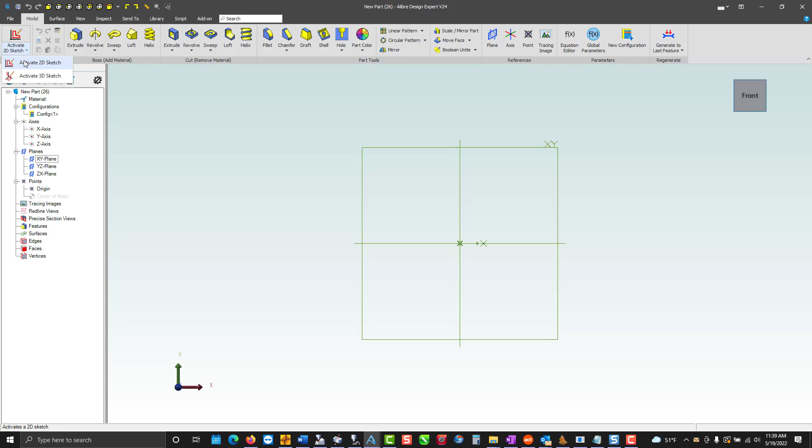First, we're going to activate a 2D sketch. Then we'll select our drawing plane. I'm going to use a connected line to define the general boundaries of our part.

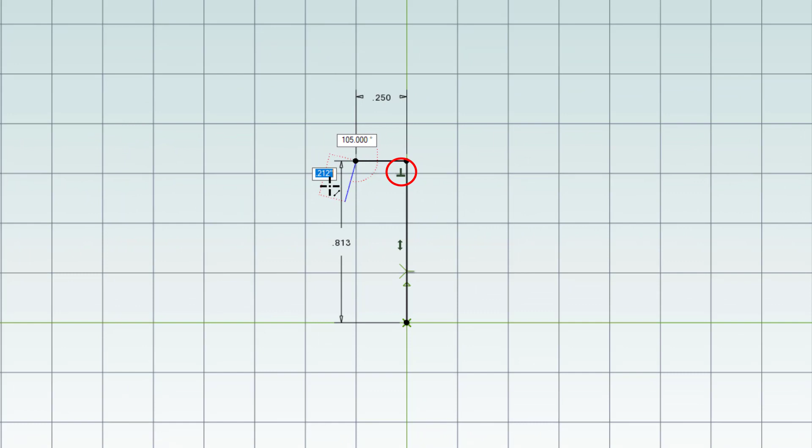In the corner, you'll notice there's a symbol, a constraint. That means these two lines will always be perpendicular to each other. I'm going to freehand the rest of our part.

The sketch has to be closed when dealing with 3D models. Now I'm going to add dimensions where there are no dimensions.

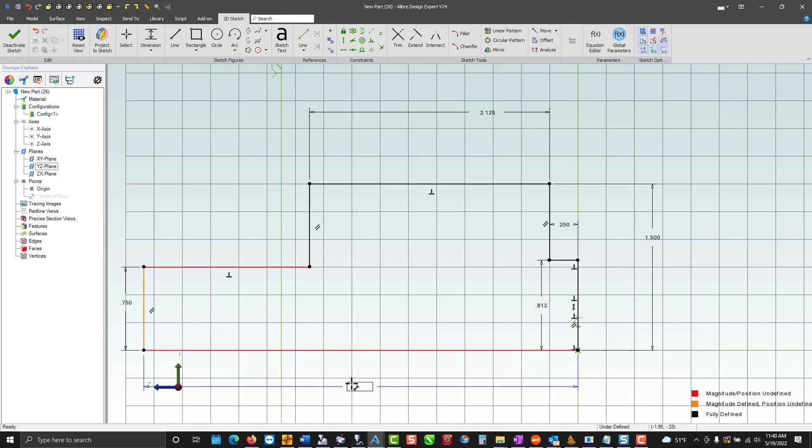I'm going to generate an OD groove. Trim the center.

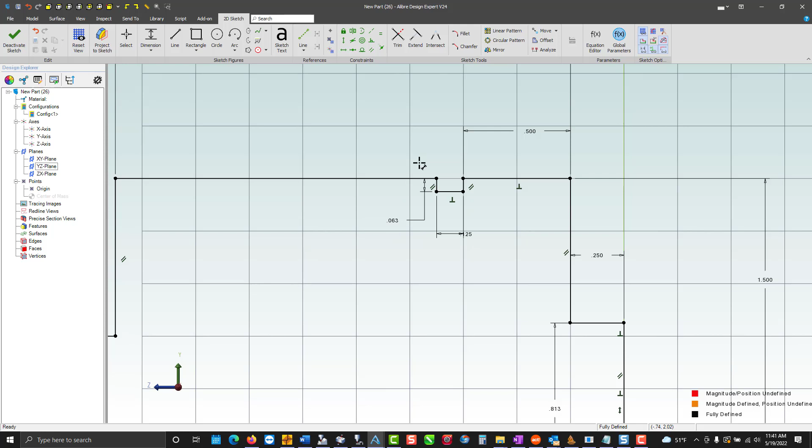Add a few fillets. Select the two lines we're going to fillet.

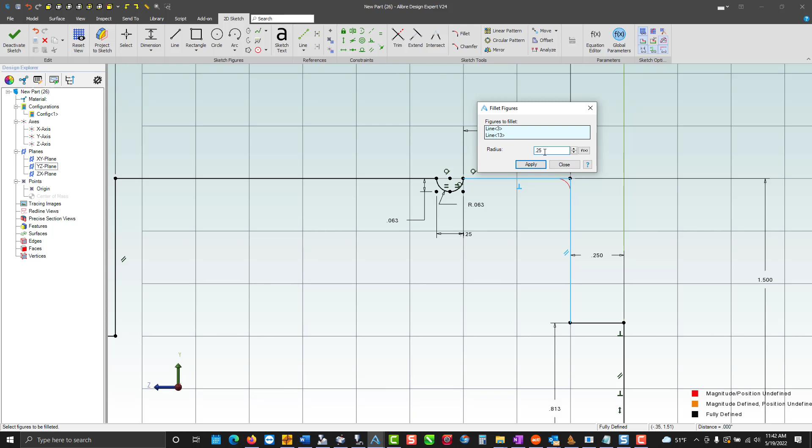Now we'll add a couple chamfers.

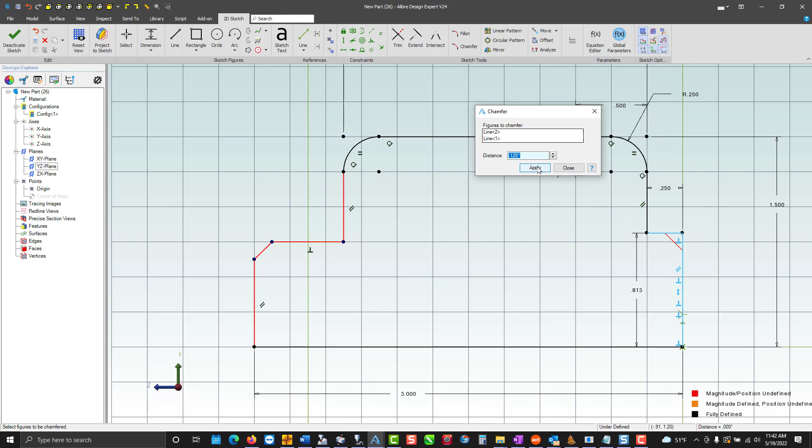Now we're ready to revolve a surface. Sketch 1, that's the first sketch we worked on. We're going to choose our axis. We're going to rotate around this line, 360 degrees.

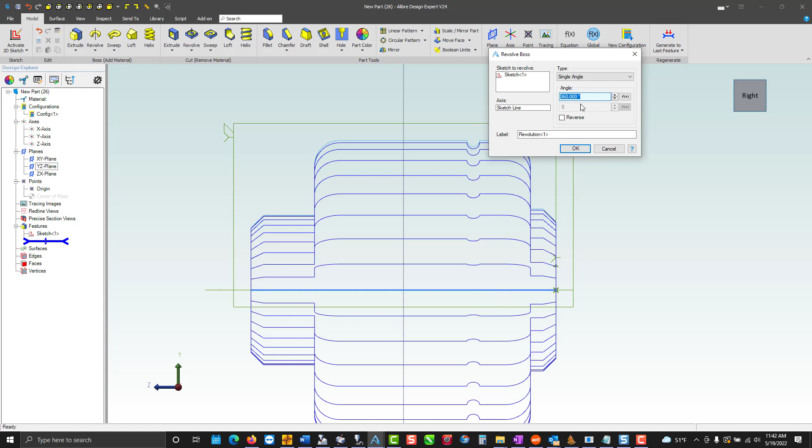Now for the flats for turn milling. I'm going to select the new plane. We're going to offset that by 1.562.

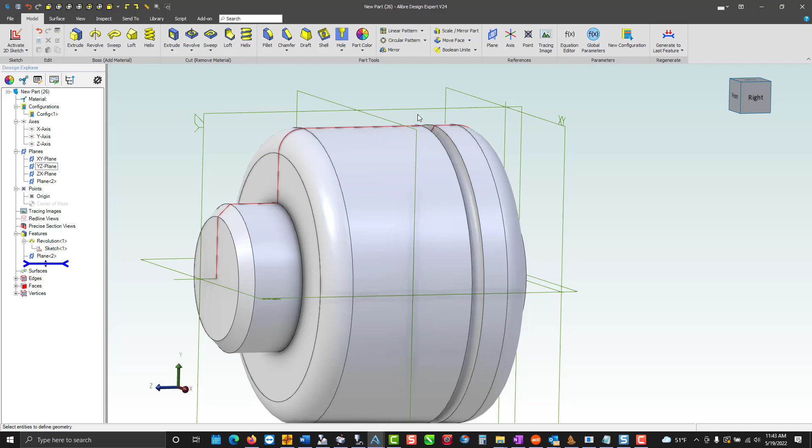We're going to activate the sketch, select plane 2. Now we're going to use a polygon, the center point, the number of sides, select our diameter.

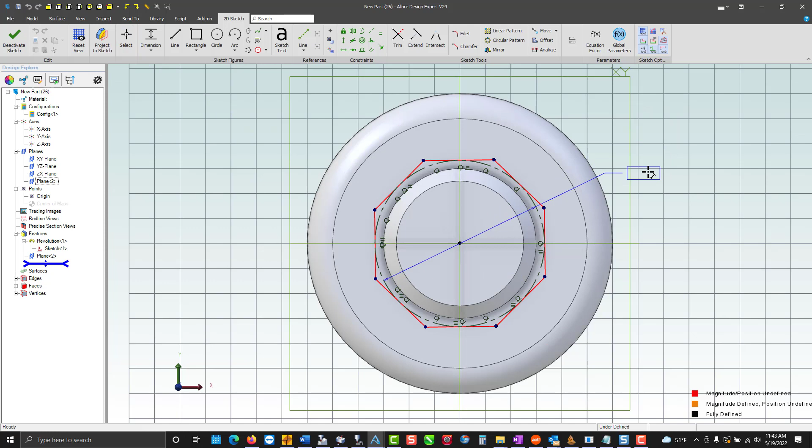We no longer need that. Now we're going to offset our polygon so that we can create an extrude to cut the part.

So we'll go to offset, figures to offset, and 1/2 inch is fine. We'll hit OK.

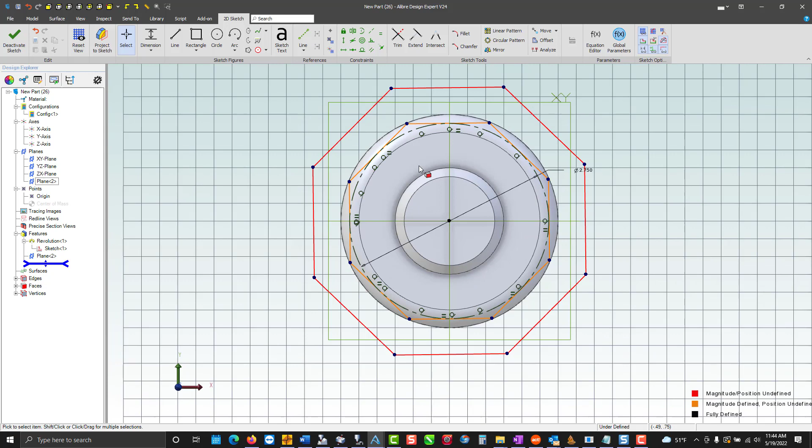Deactivate our sketch. We'll use an extrude cut. We're going to go dual depth.

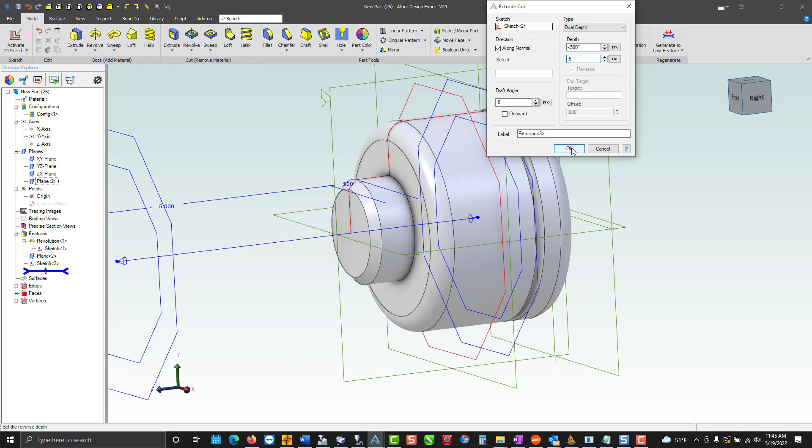That's going to be negative 0.5, 0.5. And that's completing our part at this stage.

Okay, now that we've completed stage 1 of the project, let's import the file from Alibre.

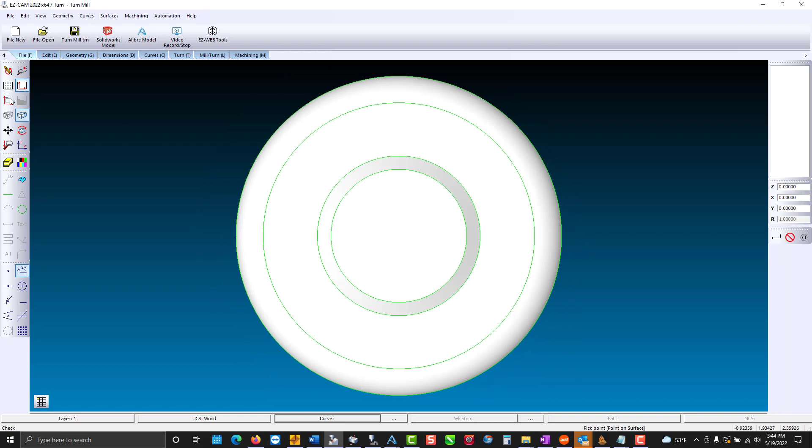Now, if I look at the top view, you can see we're not in position to do any turning. So what I'm going to do is reposition our coordinate system by using World UCS on Geometry. Then I'm only going to select surfaces and pick this front surface.

Top view again, and we're ready to turn. I'm going to turn both sides. If you have a subspindle, great. If you're manually rotating the part, well, we can separate the programs as well.

So you go to Curve, Silhouette Curve. That's going to rotate the model so that we can get the high points of this polygon.

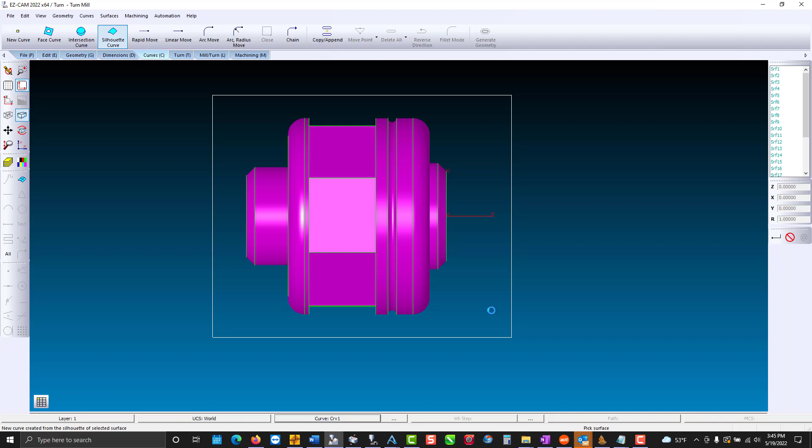Alright, now for turning, I don't need the solid model or geometry at this time, so I'm just going to blank them.

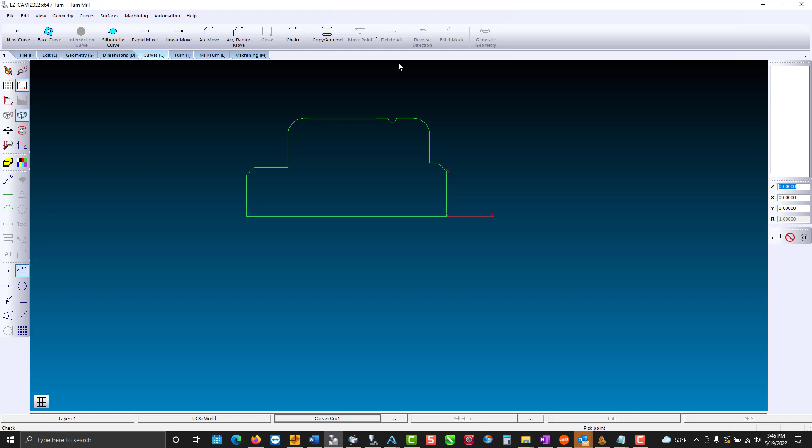We'll take our curve and generate its own geometry. Delete all links - it doesn't delete the curve, it just allows you to rebuild. So we're going to chain.

We'll rough from here over to here. New turn.

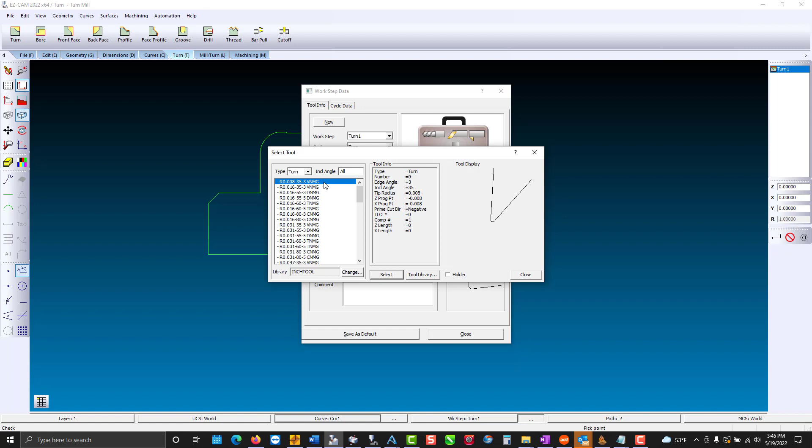There is a library. You can pick tools from a library, create your own library, create your own tools, or you can just do things on the fly like I'm doing here.

Under cycle data, I'm going to leave a finish allowance in both X and Z. The engage angle we'll say is 0.

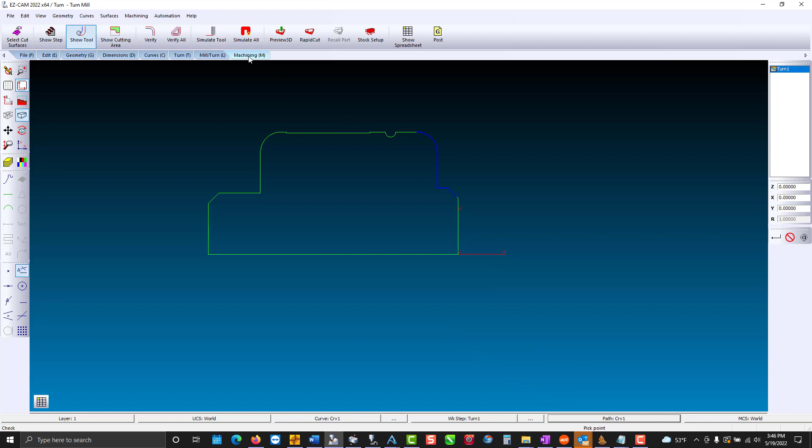Pick our path. Verify. 3D preview.

Now if you want to see the whole part, we can go to Automation, 3D Simulation, and Stock Curve. It's a cylinder. Our length is 3 inches. Our diameter is 3 inches.

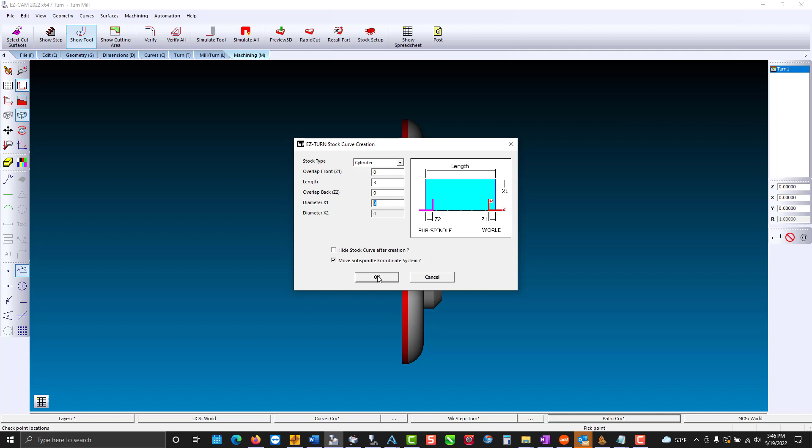We'll move our subspindle coordinate, or the back side of the part. 3D preview again.

My next step is maybe take a finished pass across the OD, maybe a finished pass on the front face. So if I was to do a profile, I can clean up that 10 thousandths that we left.

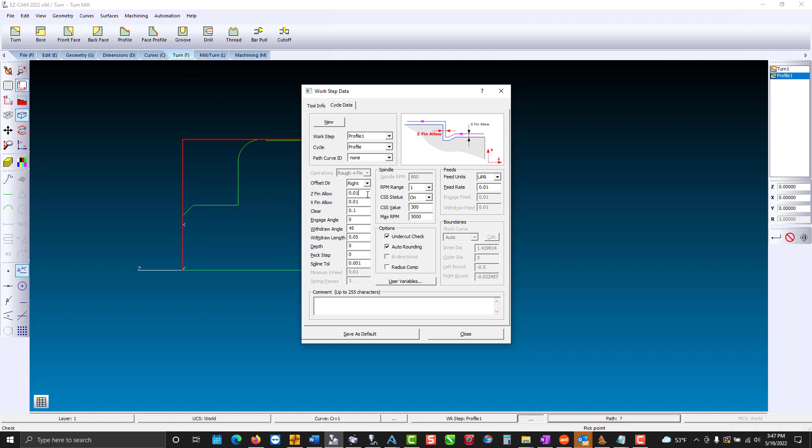And then what we do is we just go to path, select the same path, and verify again. I'm showing the tooltip.

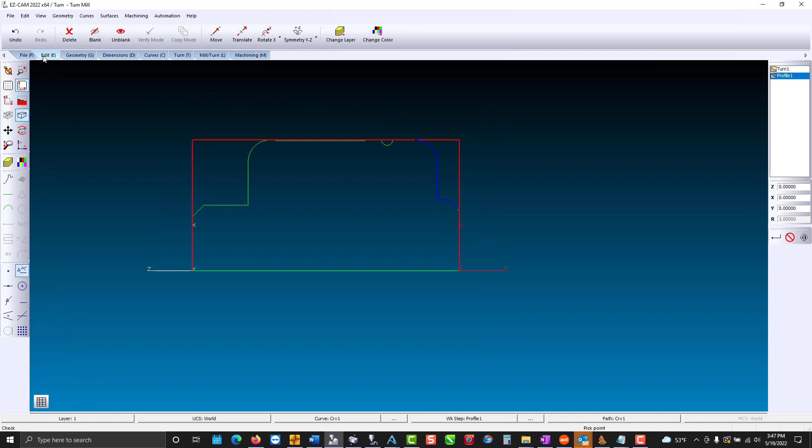Now I'm going to hide that stock curve. Make another path. We're going to machine from this end over to this end.

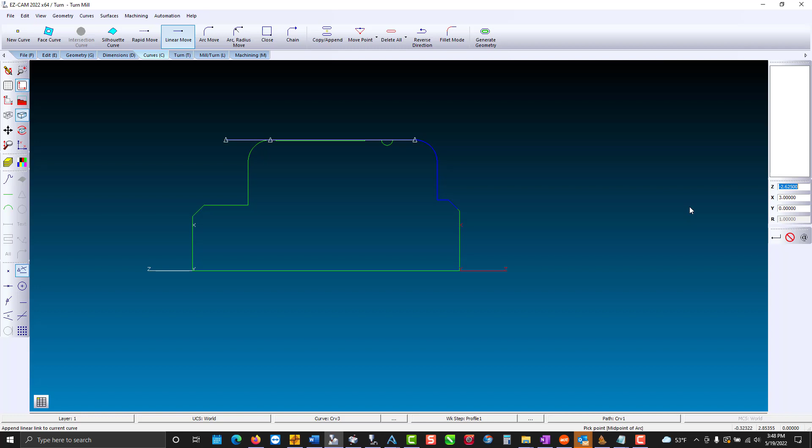If I want to extend that, I can just go into the coordinates over here on the right, go another negative 0.1, and let's go a little further, a negative 0.5. Another profile pass.

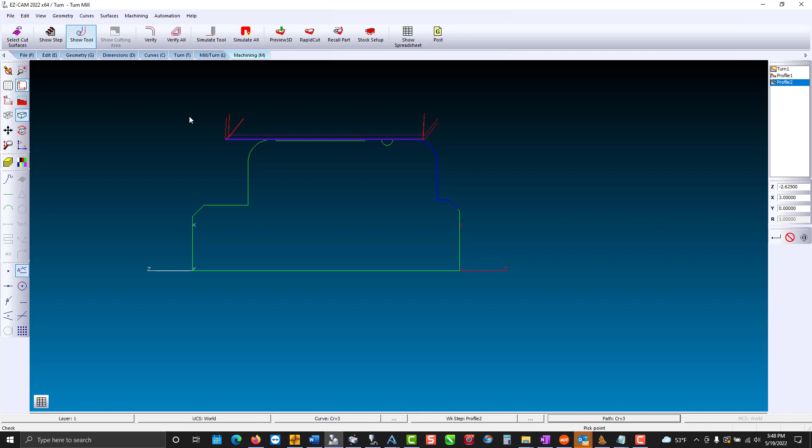Now we're ready to machine the groove. Create another curve. We'll use arc move, starting here and working our way over there.

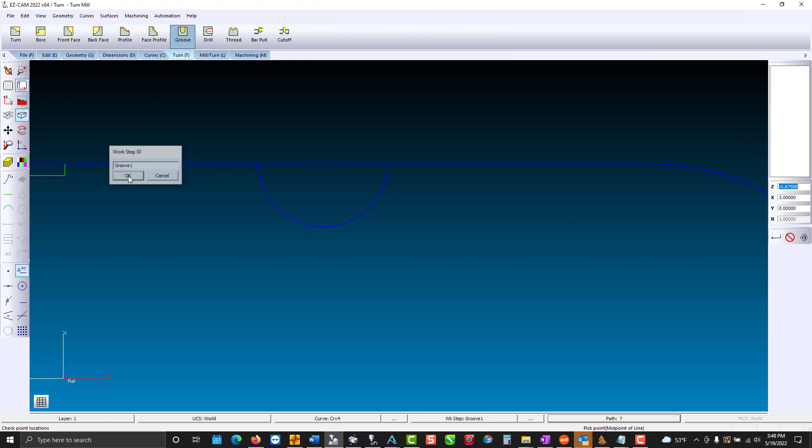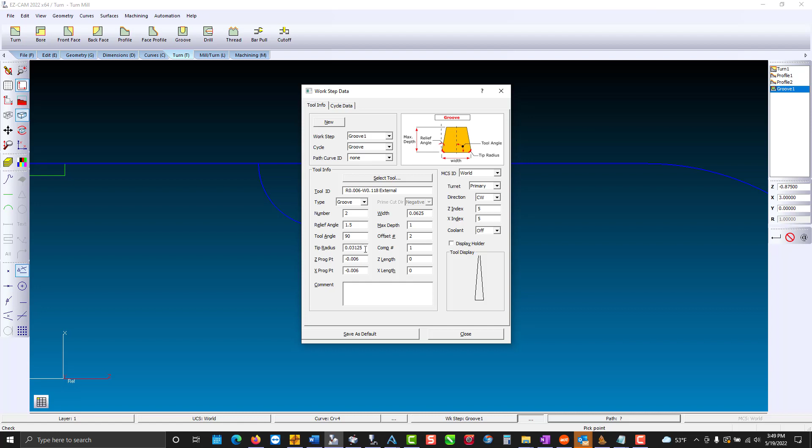We'll just borrow that tool. This will be tool 2, offset 2. The width, let's go with the 16th, and our radius is going to be 0.03125. I'll just copy that and paste it right in here. That's just our program point.

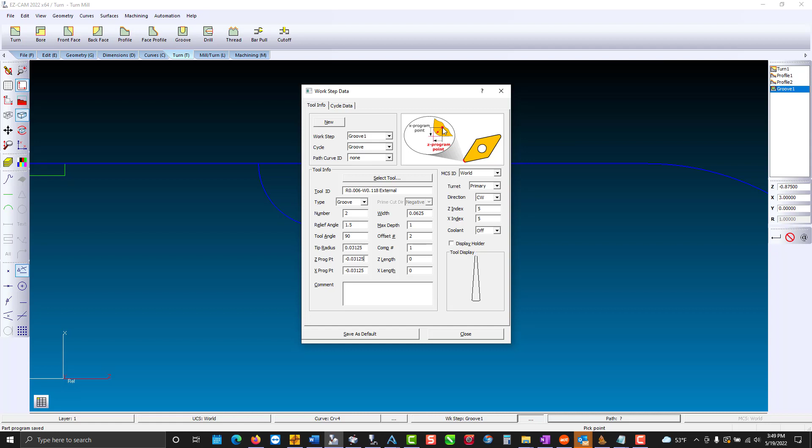If you look at the graphics, we're actually calculating the G-code from the center of the tool. So if I touched off the tool, skimmed it on the front face, we're going to move by the radius of the tool.

Alright, let's take a look at what we get from there, our path, and verify. Step over value - alright, we warn you when you do something wrong. Step over, let's make that 80%.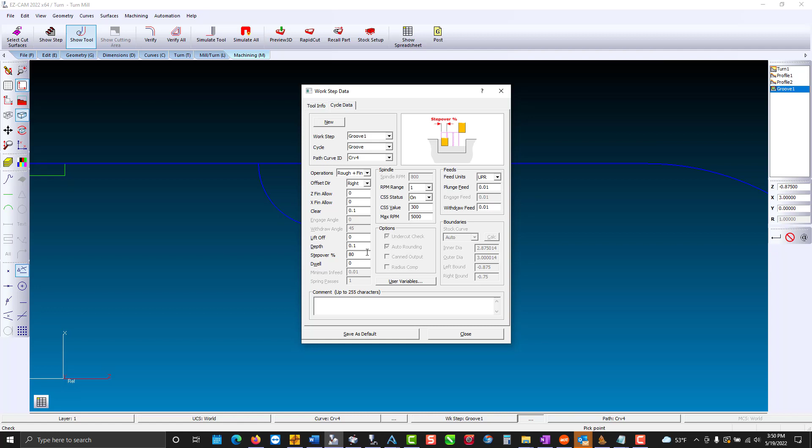Outstanding. So now let's show our model. I'm going to hide that for right now. We're going to work with our polygon.

It's 8-sided. Now for here, we're going to go and make a face curve, detect the open edges. You can see we get a little square over here. That just means that the tool can over travel in that region.

Now we go to turn mill, curve milling. This will be tool number 3, offset 3. We'll use a 1/2 inch tool. The surface is the radius of the part, so that'd be 1.5. We'll wrap it over 1 inch, and we'll feed down from 100 thousandths. Depth will be 0 because we're going to use the curve for that.

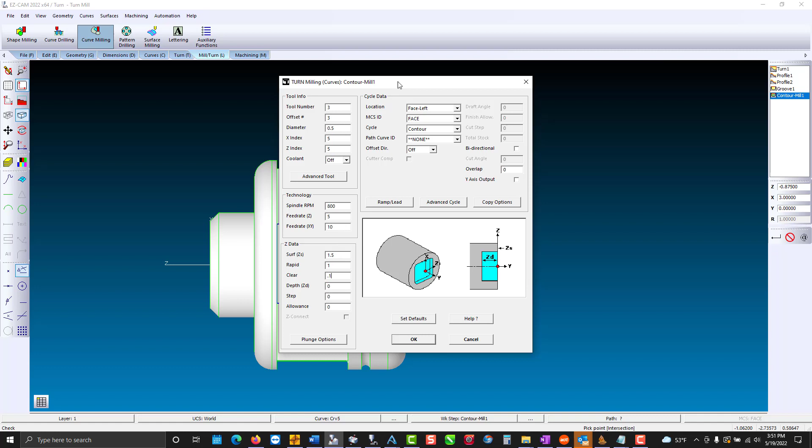We're machining the side left, that's the main chuck, side right would be a subspindle. And we're using the world coordinate system. As you can see in red, that's the world.

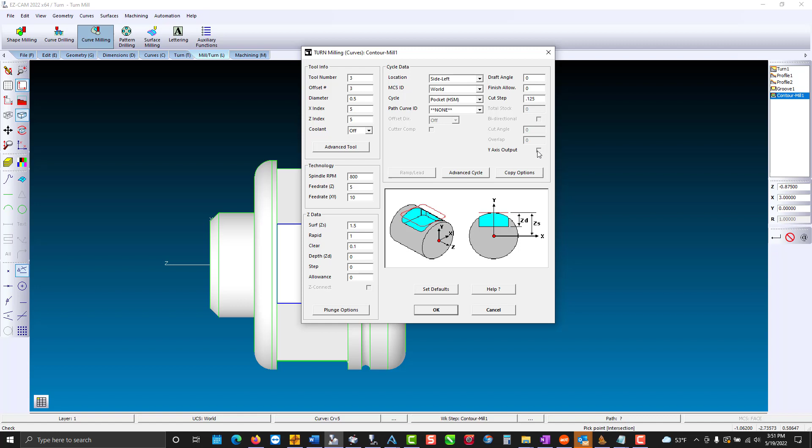We will take and use high-speed machining. Our step over for a 1/2 inch tool, let's go with 1/8 of an inch. And that's going to need y-axis output. Pick our path and verify.

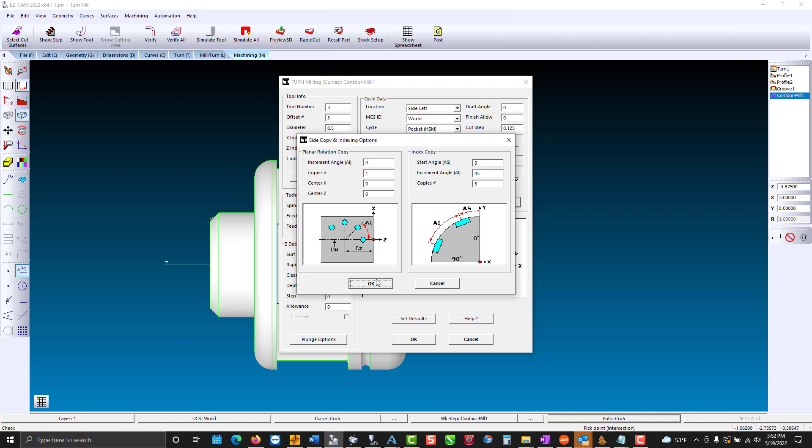I'll turn the tool off. If we preview, now we need to copy and rotate. Back into the work step, copy options, start angle 0, increment angle of 45 degrees, and we have 8 of them. Verify again. Outstanding.

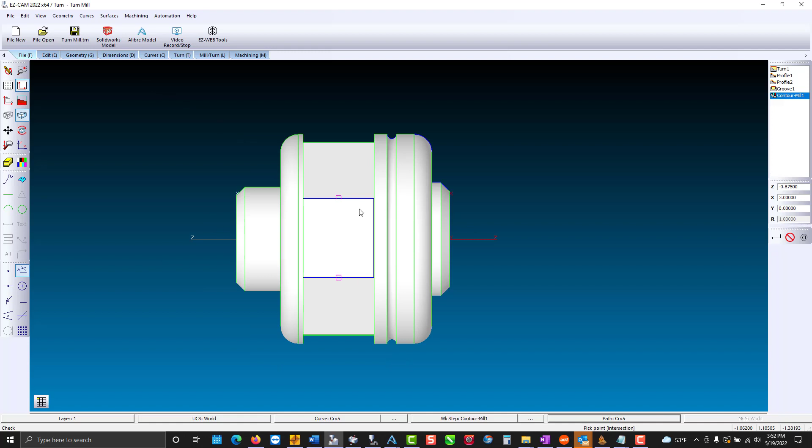Save my work at this point. And before we go into the back side, I'm going to make some adjustments in Alibre. We're going to add a couple of features to this part. So this is stage 3 of our video.

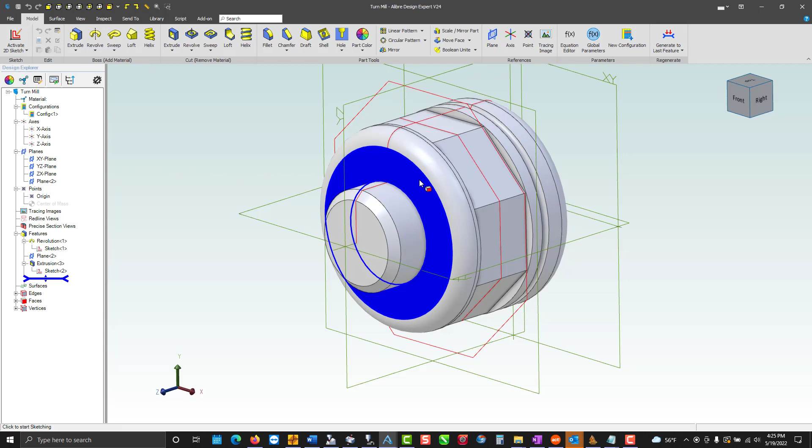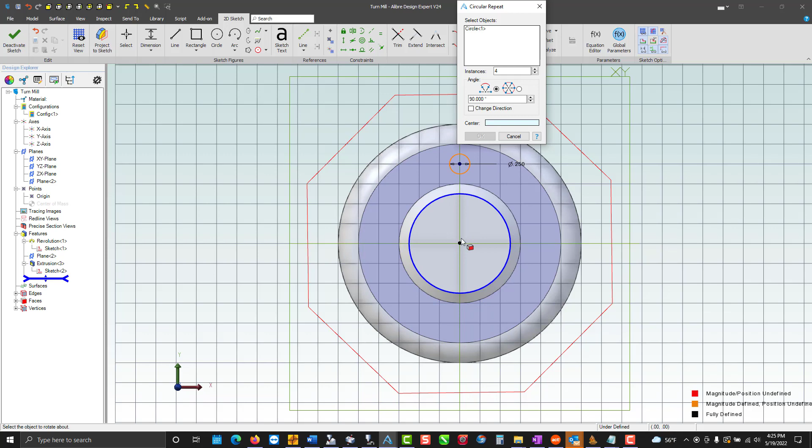We're going to activate a new sketch. Instead of picking a plane, I'm going to select the face. We're going to make a hole pattern. Snap to grid. Make a circular pattern from that, select our object, center point of rotation. Now we'll deactivate our sketch.

Make a hole, blind hole. The depth will be 0.5, diameter 0.25. Start surface. Select our holes.

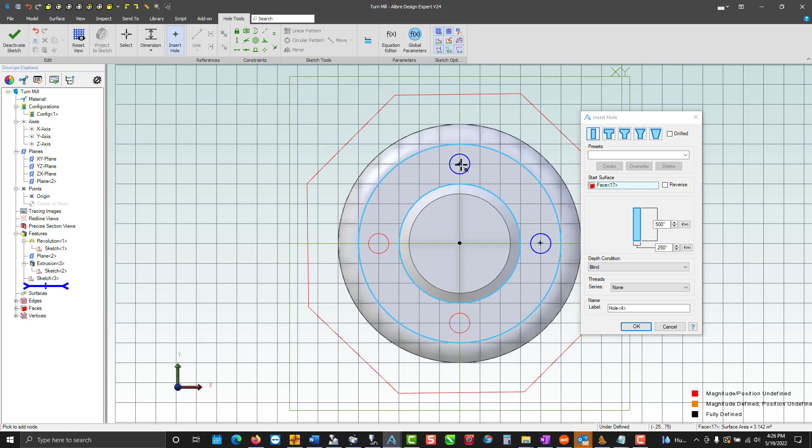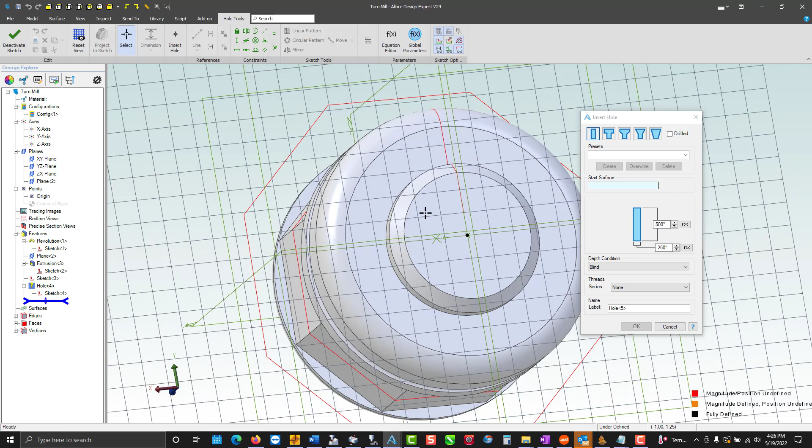Okay, now we'll pick another face and we'll make a bore, which will also be another hole. This will be our start surface. The length will go 1 inch deep, 0.75 in diameter. Select our center.

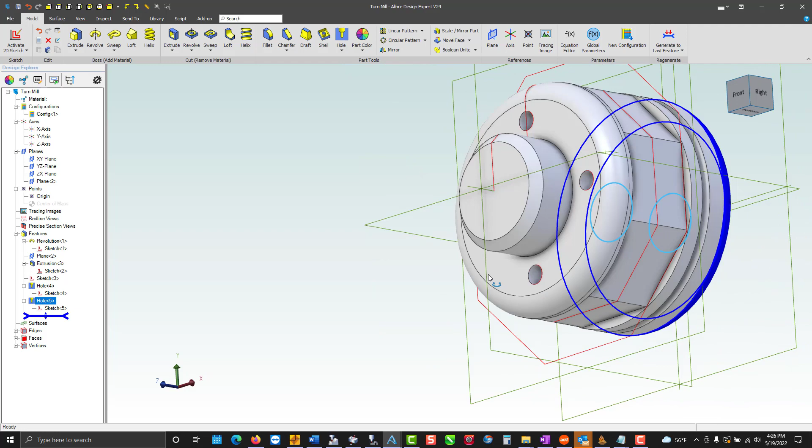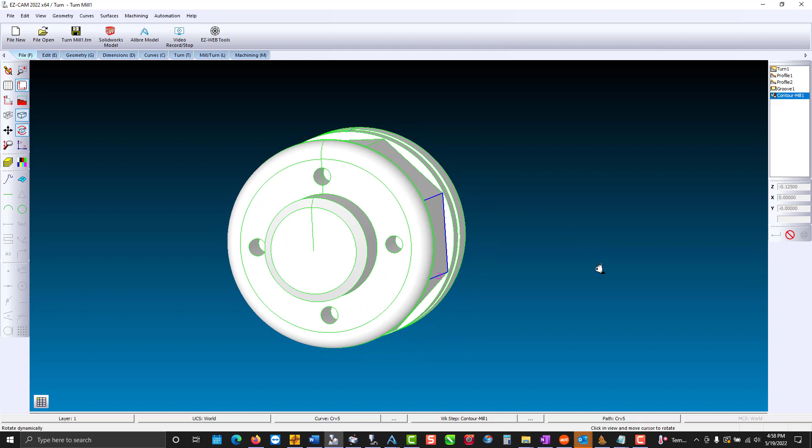Okay, now we're ready to bring this into EZ-CAM. Now we're on the last stage of our project where we will machine the rest of the part. We don't have our bore and we are missing our hole pattern, so let's update the Alibre model. And we'll just do a quick verify.

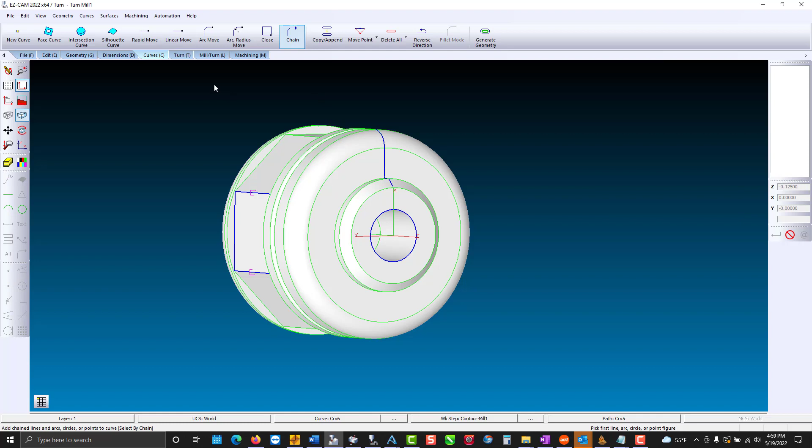This is where we left off. Now we'll machine our bore. We'll pre-drill, need a new curve. It's a 3/4 inch bore, so we'll go with a smaller tool. We'll go with 1 3/8 inches. Count for the drill tip angle.

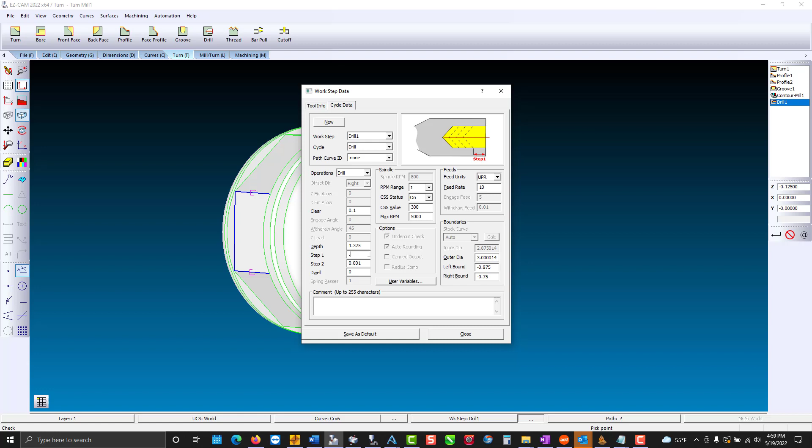Turn off our constant surface speed. Select our path. Now we're getting into the bore, so let's cut the part in 3/4. Go to stock setup and 3/4 view. Verify again.

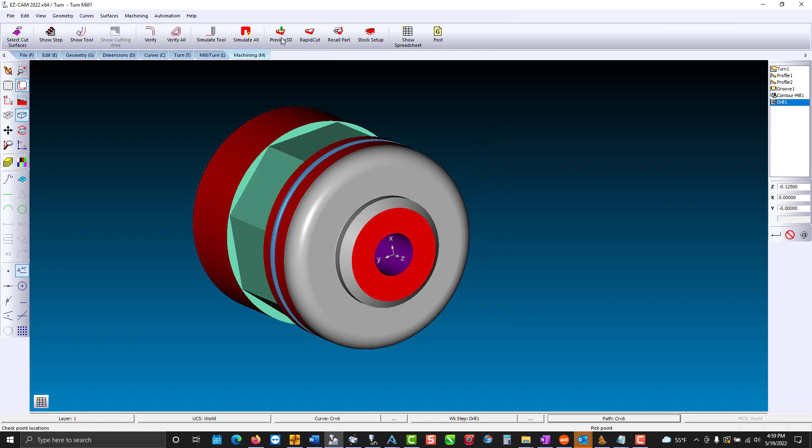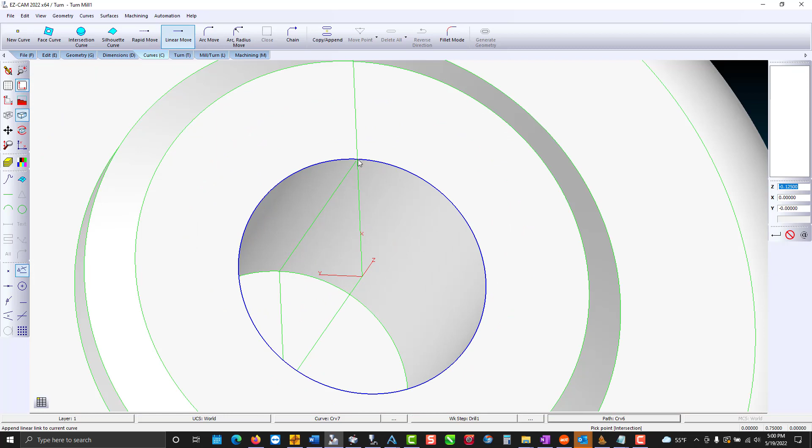Now for our path for the final bore. Start here and here. We'll use a rough bore to start.

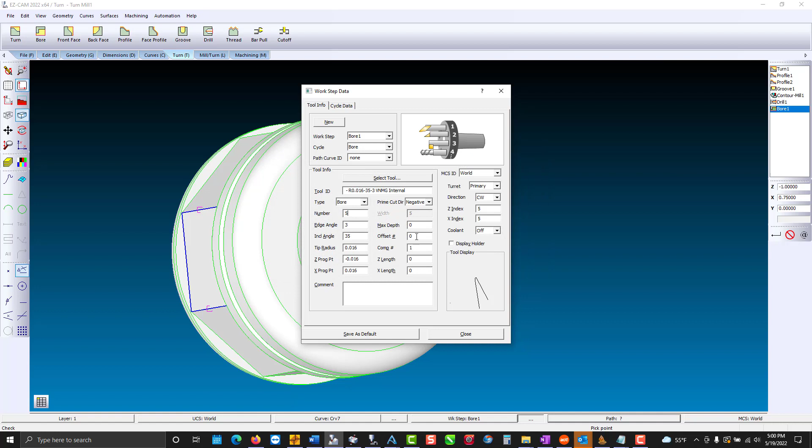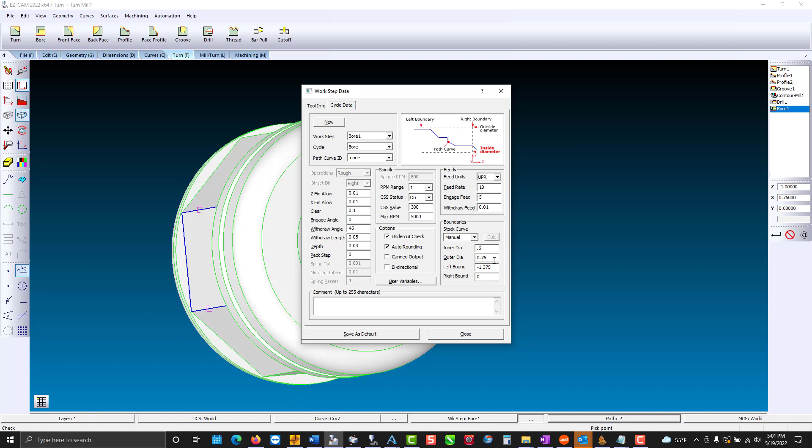Change our stock curve to manual. Our inner diameter will say 0.6 for our drill size. Select our path. Verify.

Now let's calculate. Let's go back in, 0.6. Verify again.

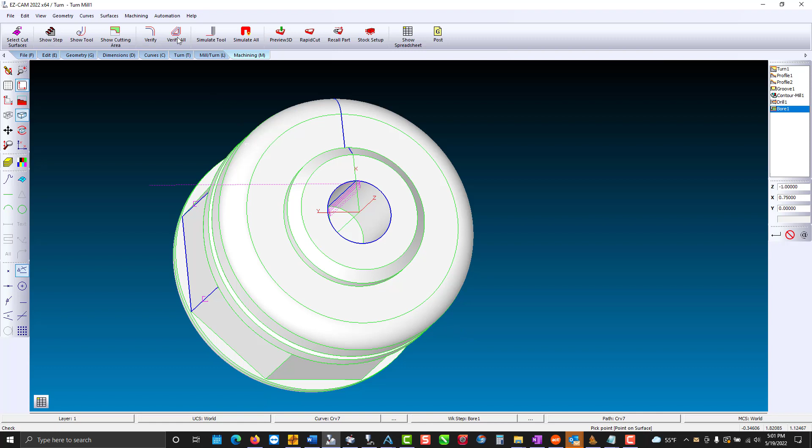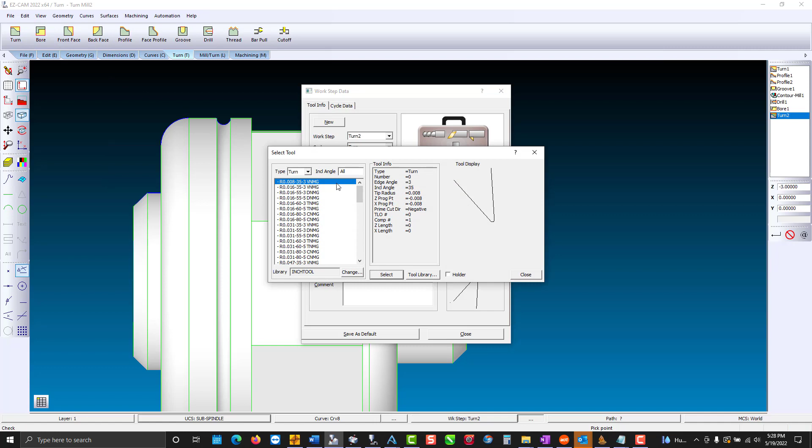We'll change over to our sub spindle. Everything we did on the main spindle is what we're going to do here. Change our coordinate system in the work step to sub spindle.

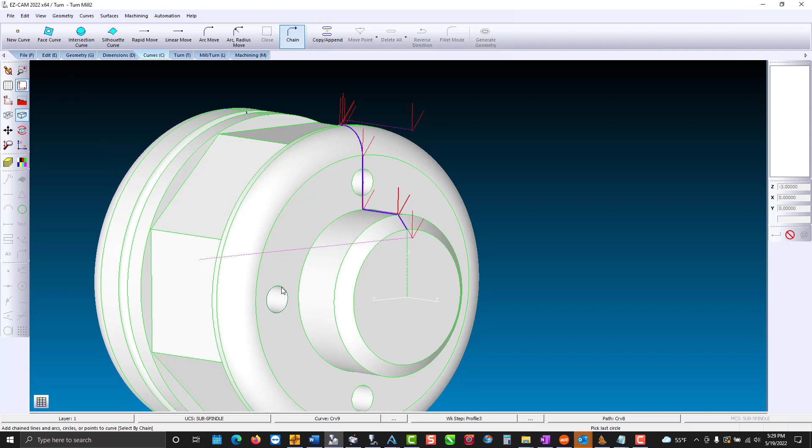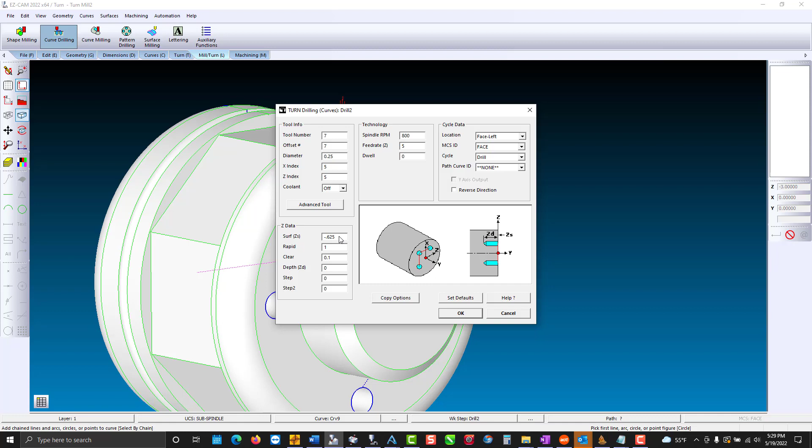Now our bolt circle. Select one hole and a second of the same diameter, and EZ-CAM will find them all. Curve drilling, this will be tool number 7. That's the distance from the subspindle 0 to the front face. We want the rapid higher than that value. And the depth of our holes is a 1/2 inch. We'll go a little bit beyond.

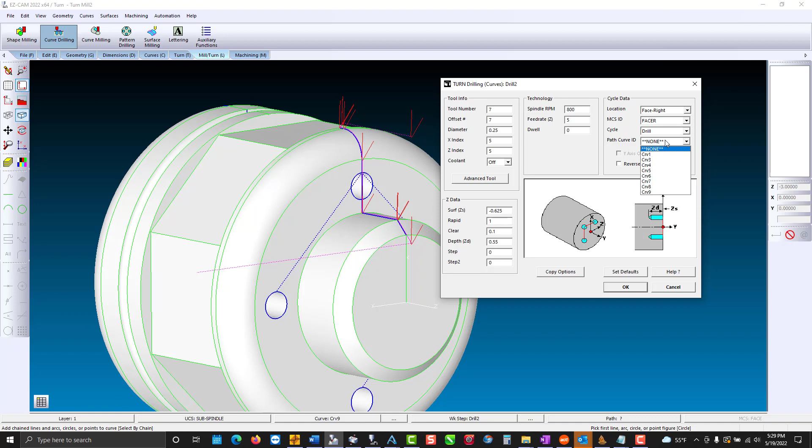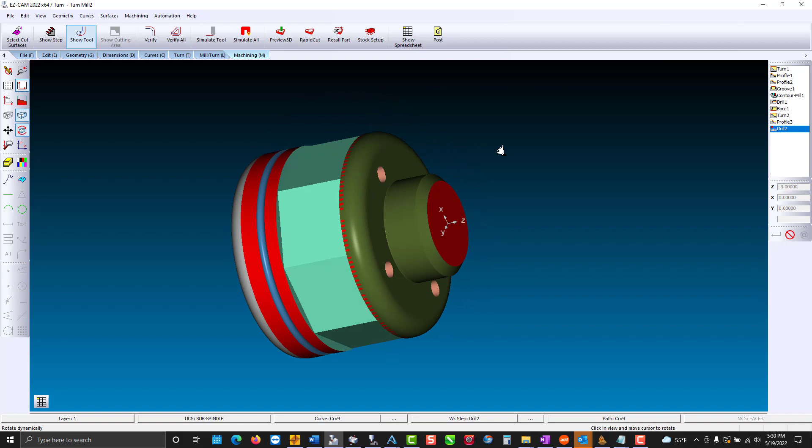This will be face right. Path curve ID will be curve 9. And we'll do a preview. We'll tie it all together. And our part is complete. Thank you for watching.